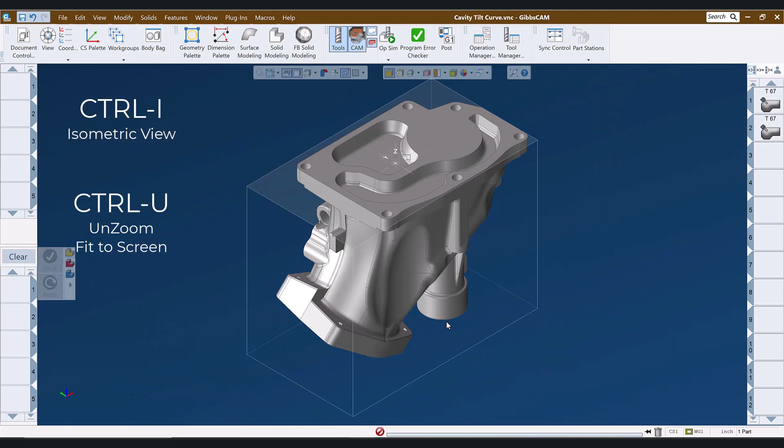Let's get started. Shortcuts, or hotkeys, are keystrokes or combination keystrokes that execute a command in the software instead of navigating menus or palettes with the mouse.

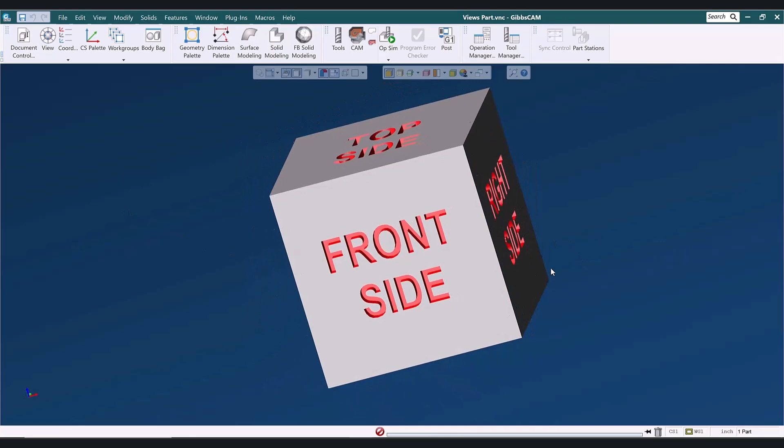Let's look at view controls. These are some of the most frequently accessed commands for many users. I have this part that I use when teaching the view controls and the view shortcuts. Each face is labeled for easy identification of the current orientation of the part. Additionally, I've turned down my animation speed in my preferences so that it's easier to see how the part is moving.

Many users select their views from either the view control or they use the axis block in the lower left corner to control views. But many don't realize that either right-clicking one of these view orientation buttons or holding down the Alt key while left-clicking will produce the opposite view for that button.

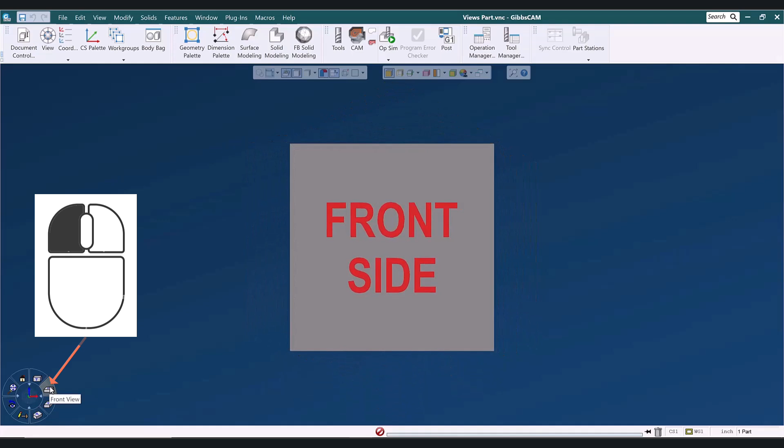So if I click this button, I get a front view, but if I right-click on the front view button, I get the back view. Clicking on the right side view button gives me the right side view, of course, but right-clicking on the right side view button produces the left side view, and so forth. This works using the view palette as well.

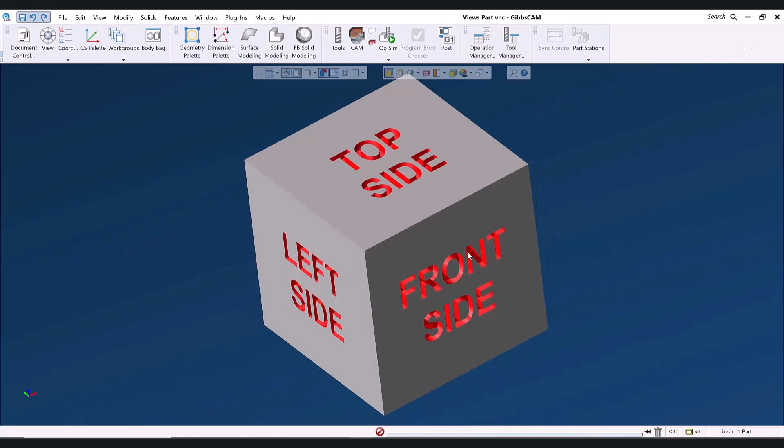The shortcut keystrokes for these view commands are among the very first that most users learn. And adding the Alt key to a view shortcut produces the opposite view. So while Control I gives us an isometric view, Alt Control I gives us a reverse isometric view. Control F gives us a front view. Alt Control F gives us a back view. Control G produces a right view, while Alt Control G produces a left view.

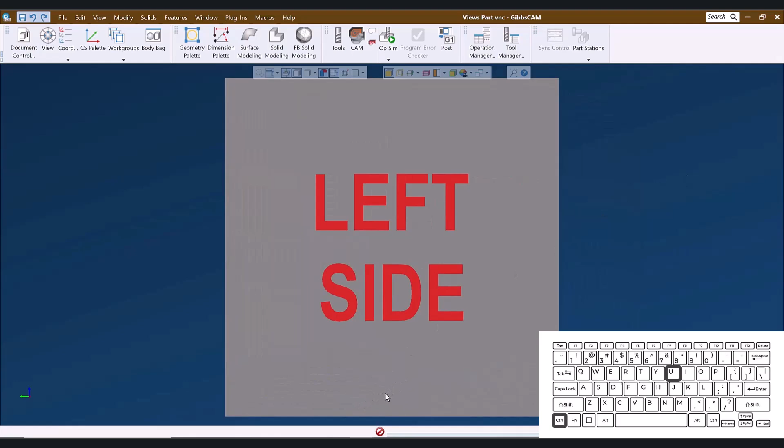Additionally, Control U fits the stock size, as it's defined in the document control dialog, to the screen. Think of unzoom to help you remember Control U. I frequently chain unzoom to other view commands.

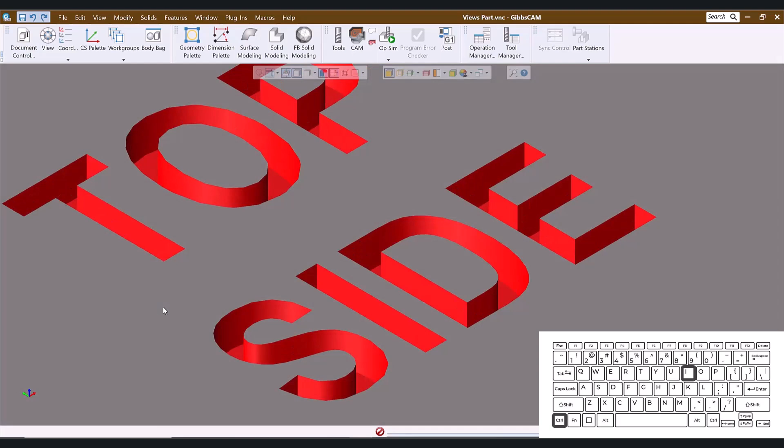For example, if I'm zoomed in on an area and I want to go to an isometric view with the entire part visible, I would hold down the Control key while I press and release the letters I and then U. This sends the system a Control I command followed by a Control U command. This changes the view to an isometric view and fits it to the screen.

What are some other types of shortcuts? There are quite a few actually.

For example, F1 through F7 across the top of your keyboard are handy since they access some of the primary system dialogues. Alternately, you can use Control 1 through Control 7, but for me the F keys seem simpler.

F1 toggles the document control dialog on and off. F2 does the same with the geometry palette. F3 toggles your tool list on and off. F4 is CAM. F5, your view control. F6, simulation. And F7 toggles the posting dialog.

And while we're looking at these, and remembering that the F2 button toggles the geometry palette, I need to mention that any button on the geometry palette or geometry subpalette can be selected by pressing the corresponding number. In other words, if I press 1, it selects point since point is the first button on this dialog.

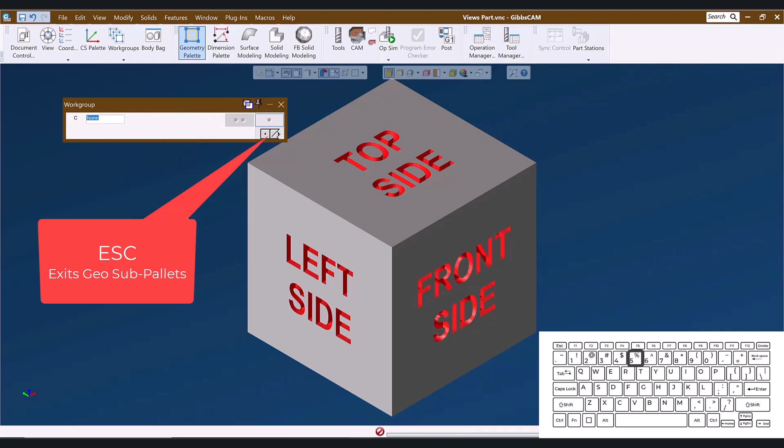Now that point is open, if I press 5, it takes me to center point. Since the third button on the geometry palette is circle, and the first button on the circle palette is center point and radius, if the geometry palette is closed and I need to create a circle defined by center point and radius, I could simply press F2 to open the geometry palette, 3 to select circle, and 1 to select center point and radius. So F2, 3, 1.

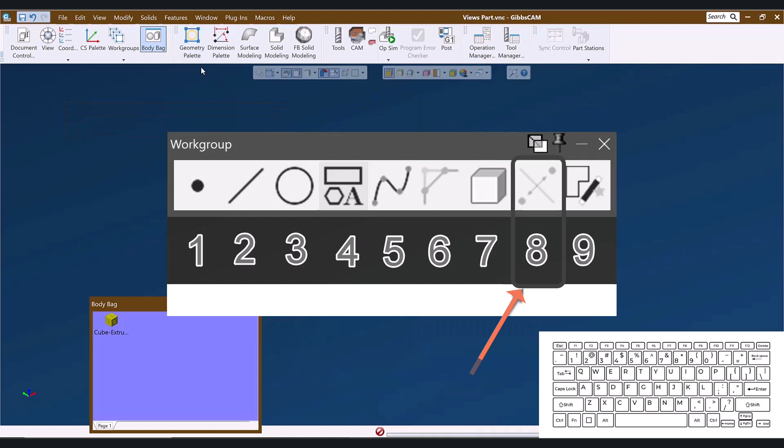I will note that the 8th button on the geometry palette is connect. So with the geometry palette open, I could select the geometry that I need to connect and press the 8. Back before I could right click to access connect, I had my middle mouse button programmed to output the number 8 just for this purpose.

If you're creating toolpath, Control and the period or the dot is do it, and Control comma is redo the selected ops. But what if there's a command that I use frequently that doesn't have a predefined shortcut?

Let's say that in my work I use duplicate and 2D rotate very often, and it would be nice to be able to call that command without using my mouse to navigate the menus.

I can right-click in my title bar or my toolbar and select Customize Toolbars and Menus. In the Commands tab, I'll find the command that I need and assign it a shortcut simply by clicking in this field and typing the shortcut.

You do need to make certain that you pick a shortcut combination that's not being used by any other command. I'll use Alt Control and the letter O, since in my mind the O reminds me of rotating a pattern.

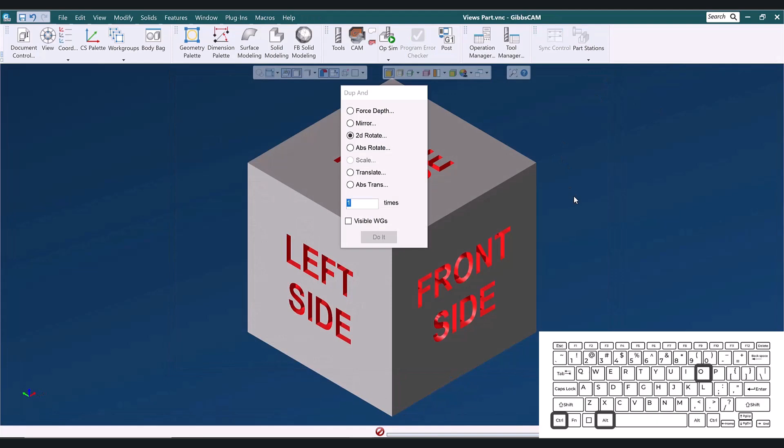Normally, I would now save my profile. Now, if I'm working and I need to duplicate and rotate an object, I can simply press Alt Control O, and I get the duplicate and rotate dialog.

In the Customize Toolbars and Menus dialog, there is a comprehensive shortcut list that can be opened, viewed, and printed here. This list is dynamic, meaning that any changes you make to command shortcuts will be reflected. You can see that our new shortcut for duplicate and 2D rotate is in this list.

This list can be a bit overwhelming though, especially when you're first trying to get comfortable with shortcuts. The PDF linked in the video description is focused on the most used shortcuts, and the format is probably better suited for making notes.

In this video, we've looked at a few GibbsCAM shortcuts and discussed how they can simplify your workflow.

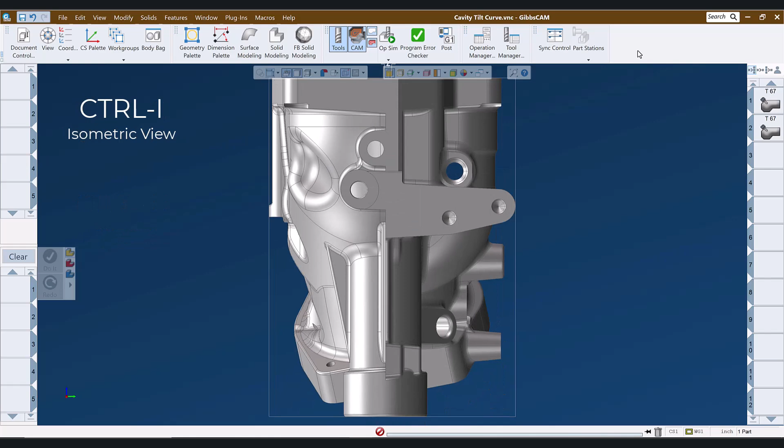Along with customizing your interface, saving tools, tool holders, tool lists, and processes, creating fixture libraries, and many other capabilities, utilizing shortcuts is a tool that GibbsCAM provides to help you streamline your workflow even further.